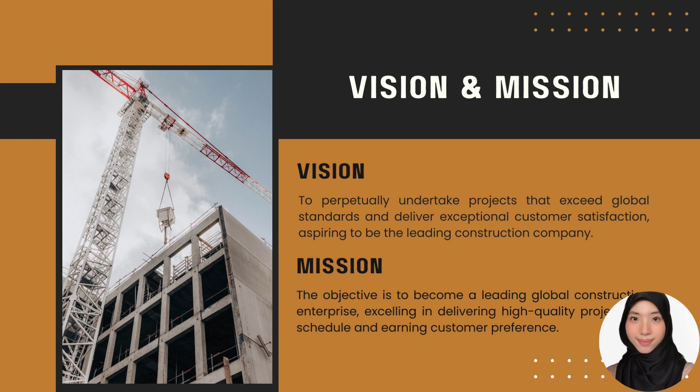Our team consists of committed, experienced, and skilled members that aim to generate value for customers while upholding the highest standards in business. I, Nur Akilah, am the construction manager for Khas Sepadu Enterprise. Other team members include Azam Najmi as the owner of the company, Muhammad Shazani as the project manager, Nur Hakim as the architect, and Afiq Haziq as the quantity surveyor. I'll hand over this presentation to my team members to explain the project costing.

Assalamualaikum warahmatullahi wabarakatuh. My name is Muhammad Afiq Aziz bin Muhammad Nizam, matric number DF210056, and I would like to explain about preliminary estimation.

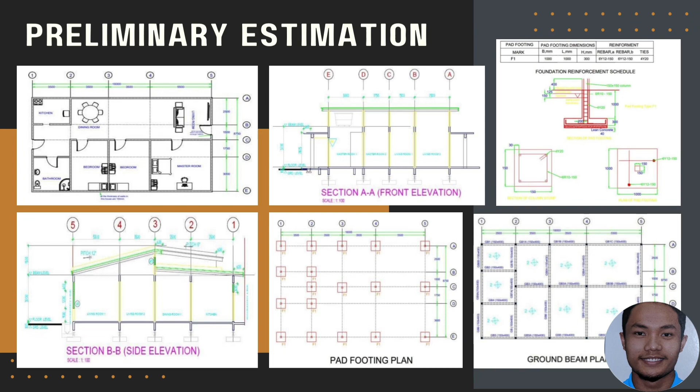After we get the plan of layout construction and the section B side elevation, we use that plan to get the floor area method and volume area method. First, floor area method: we use the formula area of floor equals length times width.

After we calculate, we can get 132.67 meters square. After we get the meter square, we multiply it by the cost per unit meter square, and we get the total cost of 43,781.10.

We continue with the volume area method. First, the same formula, but we add height. After we calculate, we can get 597.43 meter cube. After we get the volume in meter cube, we multiply by the cost per unit meter cube, which is 410, and we calculate to get 238,972 ringgit.

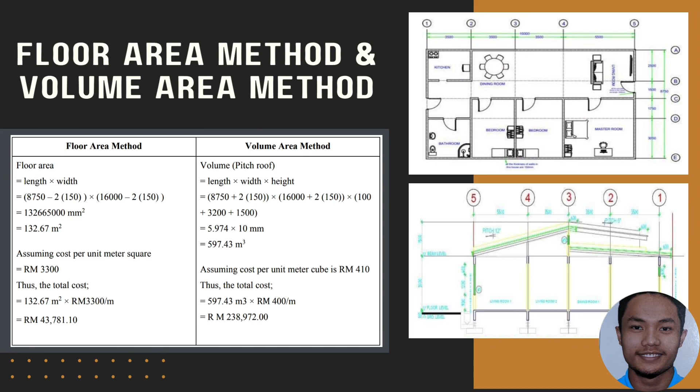Assalamualaikum, my name is Muhammad Nur Hakim. I will take part of the bill of quantity. A bill of quantity is a detailed document in a construction project that lists and describes the work to be done, materials to be used, and the associated quantities and costs.

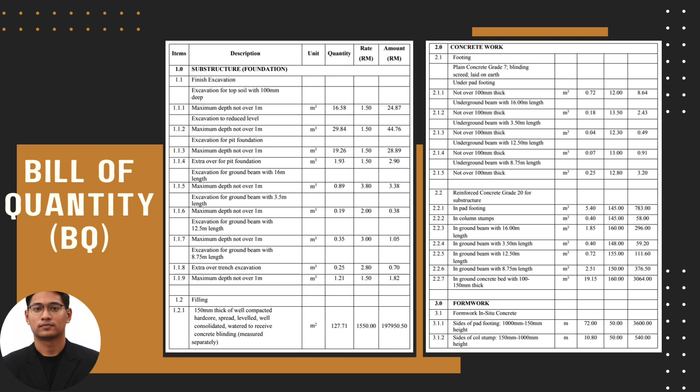Its primary function is to provide a standardized basis for tendering and cost estimation in a construction project. Contractors use the bill of quantity to submit competitive bids, and it helps ensure that all bidders are quoting based on the same set of project requirements. Additionally, the bill of quantity serves as a reference during the construction phase for cost control and project management.

For this project, we start calculating the bill of quantity with substructure, concrete work, formwork, steel reinforcement, then damp proofing and tanking. All of the quantities should be multiplied with the rate to get the amount, and the total of this project we get is 219,840 ringgit and 86 cents.

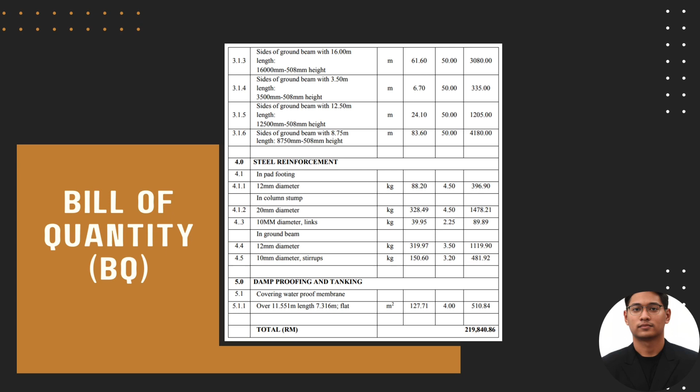My name is Muhammad Shazani bin Zamri, and I will continue our presentation with taking off. Basically, taking off is where we calculate the total quantity for our work, and for our project there are several works included, which is excavation, binding and concrete column base, formwork, steel reinforcement, hardcore and damp proof membrane.

For excavation of topsoil, the quantity of soil required to dig out is 165.75 meter square. For binding and concrete for column base, it is 6.53 meter cube, and formwork for column stump is 10.8 meter.

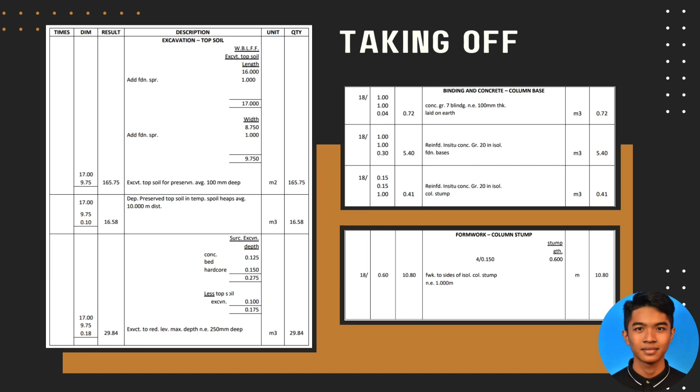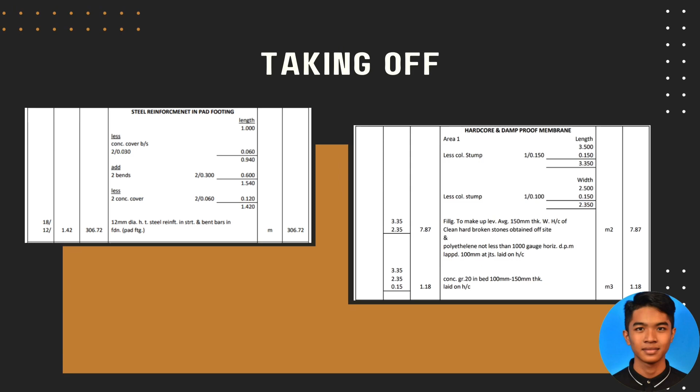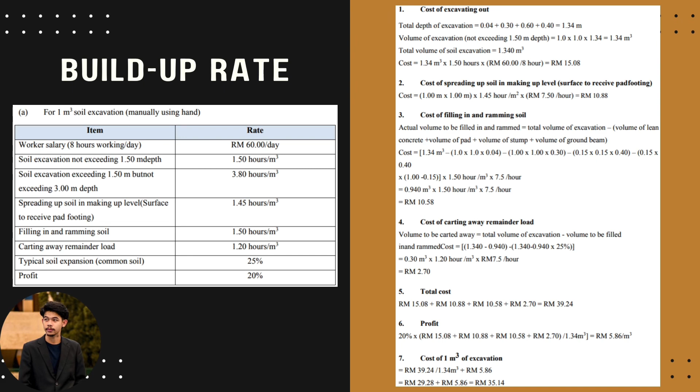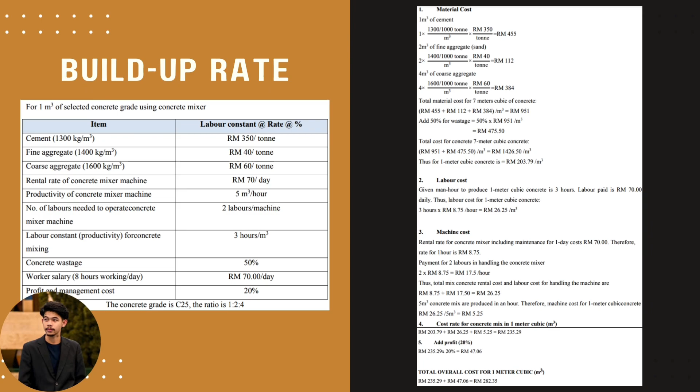Therefore, the price is only our forecast. That's all from us. Thank you.